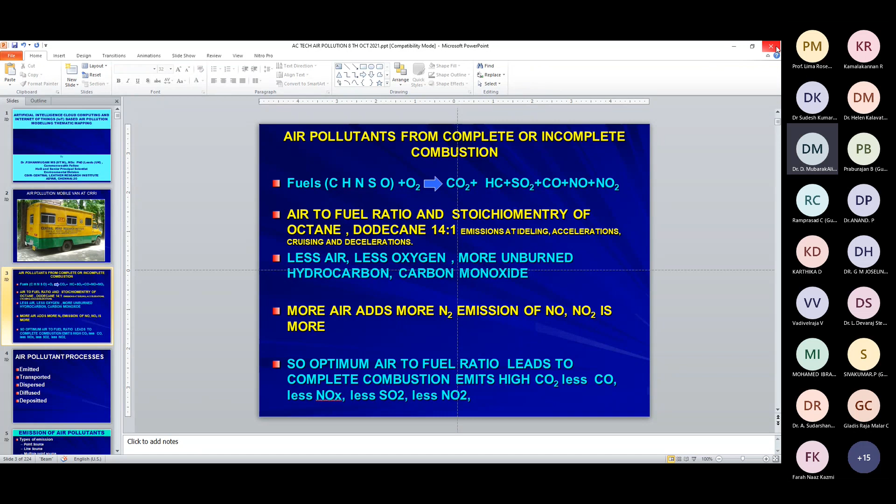Excuse me sir, your slides are not moving and you are in the first slide itself. You can make it full screen if you can. Now it's in the second slide. Is it moving? Third one slide now. Yeah, fine, that's how it is, it's moving sir, but it will not come to full screen or slideshow mode. I'm sorry, it's not in slideshow, oh I'm in the slideshow but it's only showing here. Okay, we'll adjust with this, though the presentation will be odd if it is so. How about now, it's a little bigger. Is it in slideshow now? No sir, it's not in slideshow. It's just a little bigger but still in that format normally used for presentation - yeah okay but it should be in slideshow mode. It's still in Microsoft PowerPoint format, it has not shifted to slideshow. Sir please click on the right side lower corner - yeah that one, lower corner, the first one, after 100% it shows, afterwards the first one, 100% and first one - I click the same, oh achha, okay now I click the same, yes there is a problem. Where is the problem, with me or elsewhere? No, because on my screen it is slideshow, on my screen it is slideshow. Oh achha, maybe there is some problem - theek hai, nahi maine mere screen pe abhi slideshow dikhta hai. Sir why don't you remove and join again, sir? Okay I'll join again, yes sir. Yesterday ma'am also had this kind of issue and they got it done. Okay I'll just leave, come out and join - just a minute.

Hello sir. The only meeting organizers and presenters can share like that. You have not given me the permission to share. You're there as the presenter. But the share button is not open, it says only meeting organizers and presenters can share. Only two of us are there, you and me. You're there as presenter only. If I do anything, you'll become an attendee, maybe I'll do that and then put you back as presenter. We'll see whether it works.

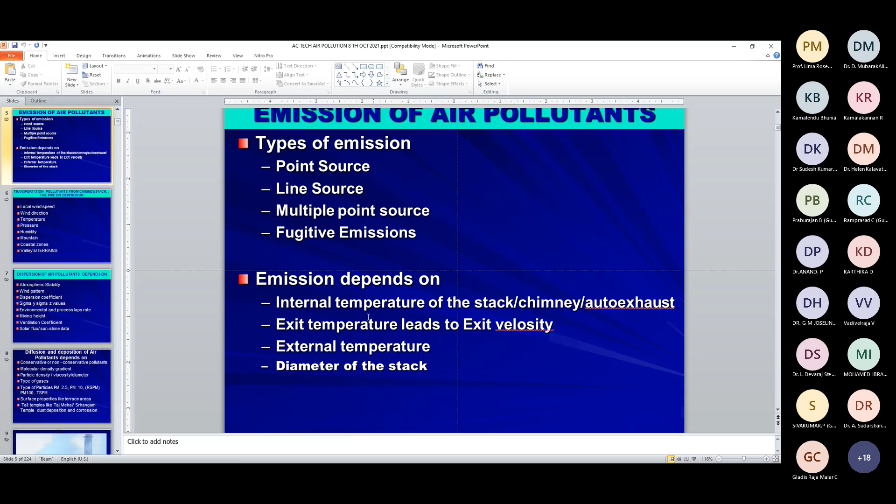This is what we normally call source emission inventory. Whenever pollutants come out from any source, what is the strength of the source - the strength of pollutants arising from a point source, line source, multiple point source, or fugitive emission - is a very important parameter to model and predict. These emissions depend on internal temperature of the stack, chimney, and auto exhaust. Exit temperature leads to exit velocity, and exit external temperature and diameter of the stack are the major factors that the emission velocity and further processes depend on.

The transportation, or the transport of pollutant - the third important process - is called the transport of pollutant from the chimney or stack.

When a chimney emits a pollutant, the next process is called transportation of the pollutant, where it travels. That's called upwind, and the distance it travels, finally ending in deposition, is called downwind. So from the upwind direction, according to how the wind is flowing, the pollutants and the plume will flow.

So the local wind speed is an important parameter - what wind speed it is, in miles per hour or not - and what is the wind direction. There are 16 directions of the wind: southeast, south-southeast, northeast, north-northeast, east-southeast, and so on. The 360-degree angle of the globe is divided into these 16 directions.

The temperature is one of the important phenomena when the pollutant travels, along with pressure and humidity. If it is in the mountains, it straight away comes down or goes up. In a coastal zone, particularly a city like Chennai located on the coast, there's a tendency to receive all the pollutants because of the breeze when it goes inside. When the breeze comes out it takes little, but more often when the breeze goes inside, it carries the pollutant into the sea, the valleys, and the terrains.

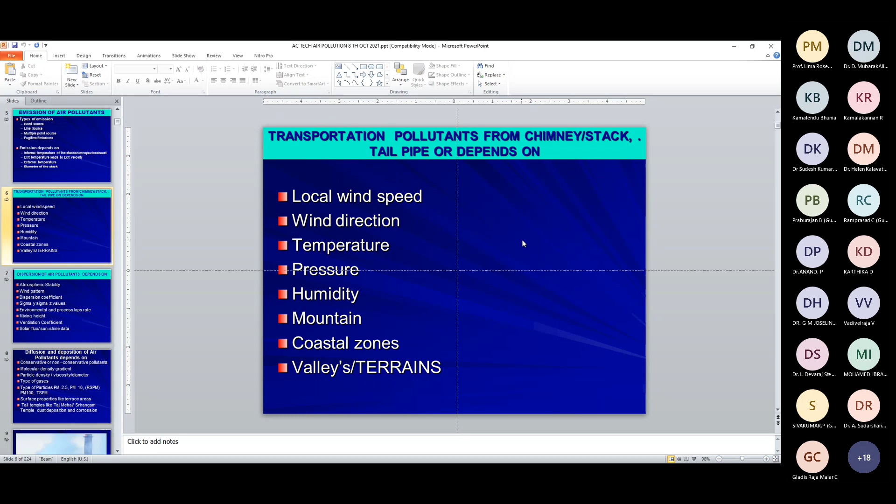So this is the transportation of the pollutant - the distance it can travel. Particularly if the wind speed is very high, it can travel a long distance. If there is no wind speed, it cannot travel far. So the next one is dispersion. First I said emission, second transport, and the third one is dispersion of the air pollutant.

These depend on atmospheric stability. What is called stability of the atmosphere? It is the tendency to resist the dispersion of the pollutant or enhance the dispersion of the pollutant. Scientifically, when the earth is heated up, a buoyancy force comes out from the earth. That buoyancy force, called temperature lifting, will take the pollutant to a higher altitude. If the earth is not heating up, there is no buoyancy force, and whatever pollutants are emitted from the chimney or automobile industry exist as they are in the lower atmosphere.

The atmospheric stability is the important parameter to decide the dispersion of the pollutant and to decide the maximum ground level concentration of the pollutant near the chimney or near the road, or far from the road. Stability is one of the important parameters.

Again, the wind pattern has got wind speed and wind direction put together. We prepare a wind rose. What is a wind rose? It shows, according to a particular location, which direction the pollutant travels and at what speed - that we call the wind pattern or wind rose.

And the dispersion coefficient - sigma y and sigma z values - are very important parameters to predict the dispersion of the pollutant.

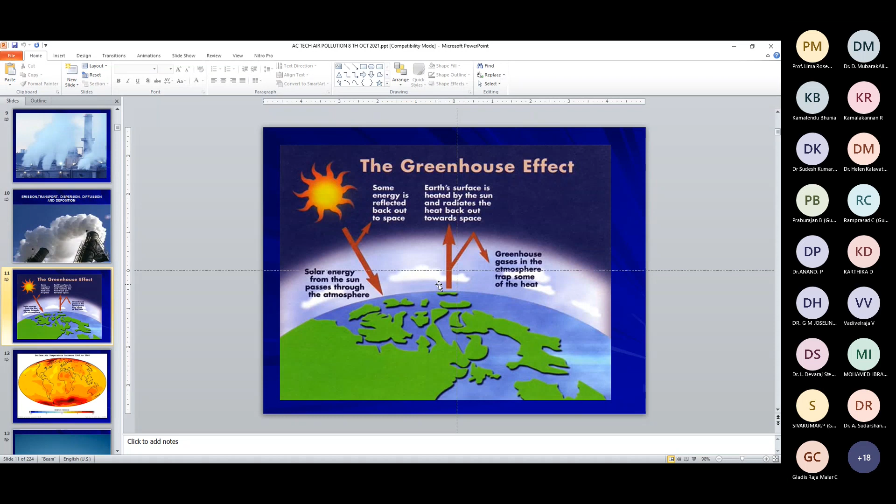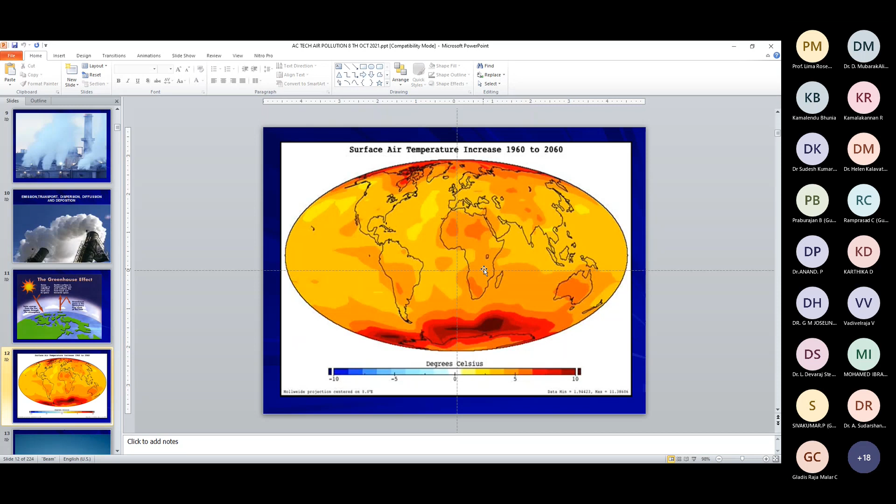This is why we give so much importance to air pollution instead of solid waste management or water pollution. Whenever water pollution is in a pipe, it can be controlled and made into a detoxified substance. But with air pollution, once it is emitted to the atmosphere, it is not in our control.

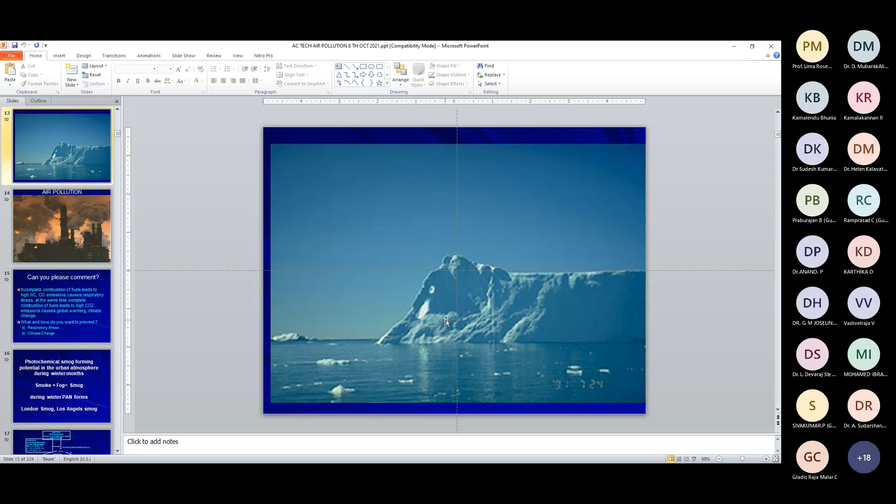It is in the atmosphere's control, the phenomena or process of atmospheric stability that is going to play. So we need a better understanding, although we cannot have exactly accurate understanding of how it is going to predict or map it. But almost 90% to 95% accuracy we can certainly predict. So these are some of the scenarios.

Incomplete combustion of fuels leads to a lot of carbon monoxide and hydrocarbon emissions, and that's what I wanted to mention here. Photochemical smog forming potential in the urban atmosphere of any urban center during winter months.

This is one of the important processes and concepts we must all be aware of - whether the smog episode is likely to happen or not in most urban centers.

Particularly in Chennai, if you take January 12th or January 10th, January 15th, in the morning it's very intense cold because you'll feel a lot of foggy conditions. That is when vehicular pollution emits a lot of smoke, and that combines with the fog, and that becomes the smog.

When the smog exists in the atmosphere at more than 10 or 11 o'clock, when the UV rays and sunshine rays are appropriate, the photochemical reaction triggers, and the ultimate end product of the photochemical reaction is peroxyacetyl nitrate.

That is why peroxyacetyl nitrate was one of the major culprits that took a lot of lives in the Los Angeles smog and London smog.

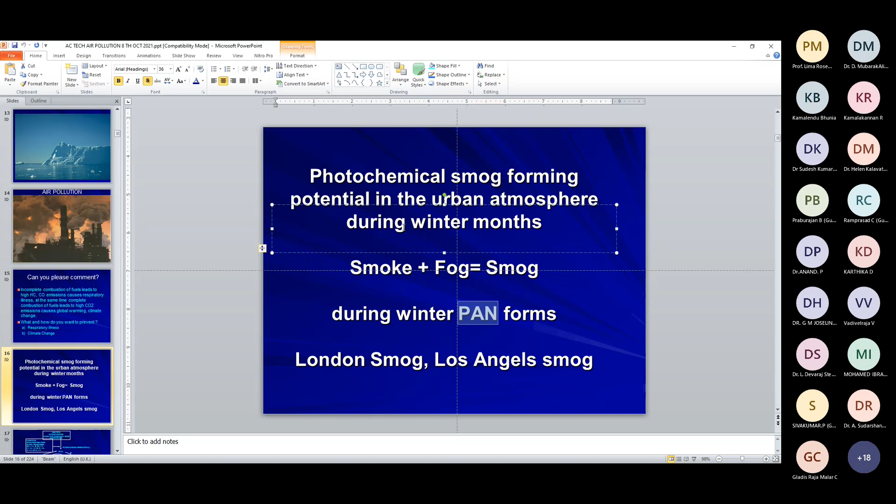So therefore, if the Los Angeles smog and London smog are not to occur in our own country, we must be alert about how to predict the photochemical smog forming potential based on the different precursor pollutants being emitted from vehicles or industries.

So how this photochemical smog forms - I just wanted to mention this to you. Reactive hydrocarbons are emitted from automobiles, and these undergo principal oxidation reactions in the atmosphere.

It happens when nitrogen oxide or oxides of nitrogen or nitrogen dioxide is emitted to the atmosphere. The photon energy oxidizes it and converts it into NO plus O, and the atomic oxygen combines with molecular oxygen, forming surface ozone.

So when the surface ozone is high enough, particularly between 10 and 11 o'clock in the morning at moderate sunlight, again with the photon energy, this forms further reactions.

But this ozone, O3, in the surface ozone actually oxidizes the hydrocarbon free radical. For oxidizing the hydrocarbon, the surface ozone is the biggest culprit - it oxidizes the hydrocarbon and forms a free radical.

This forms peroxyacetyl nitrate at the end, which becomes a carcinogenic substance, causing a lot of suffocation and many other natural diseases.

So therefore, photochemical smog is one of the important concepts we must all address. This is one study I worked on when I was in Delhi.

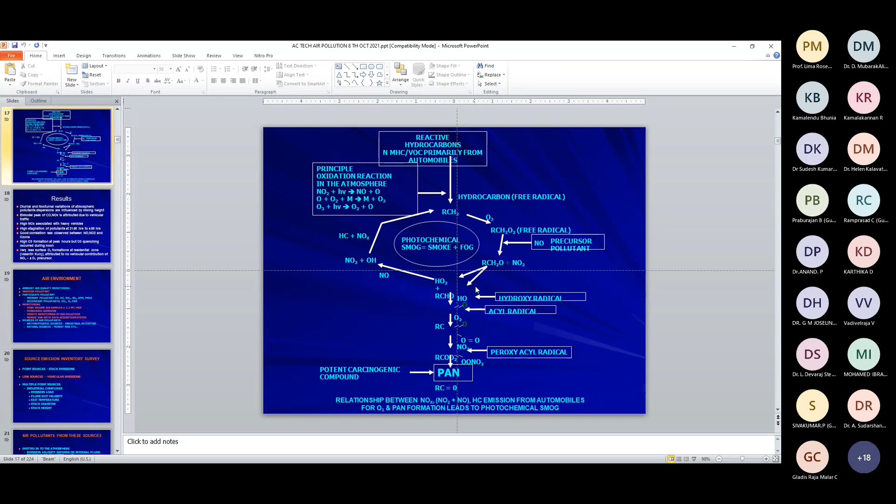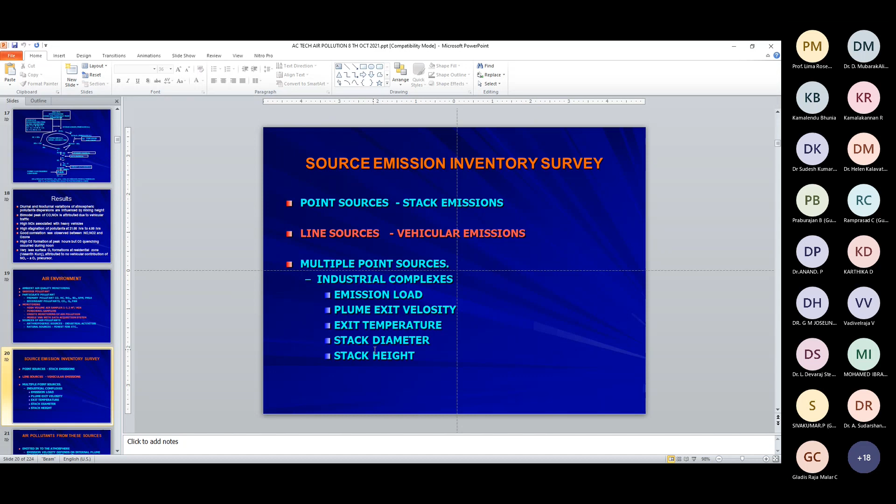So these are the sources - anthropogenic and natural sources. I've already mentioned point source, line source, and multiple point source. For industrial complexes, we need the emission load, or source emission inventory, and the plume exit velocity, exit temperature, stack diameter, and stack height. Air pollution from these sources is emitted, transported, dispersed, diffused, and deposited.

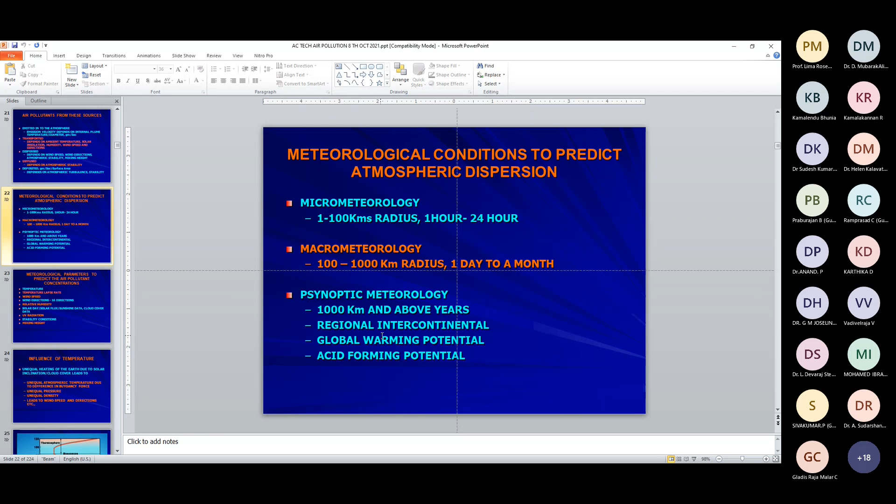Very importantly, micrometeorology and macrometeorology parameters matter. Micrometeorology covers a distance of 1 kilometer, 1 to 100 kilometer radius, and hourly pollutants up to 24 hours; we can use this to predict micrometeorological models. Macrometeorology covers 100 to 1000 kilometer radius, and synoptic meteorology is 1000 kilometers and above. This is the regional intercontinental model, particularly for climate change models. So we call these micro scale, meso scale, and macro scale models, and the synoptic model is used for global warming potential prediction and other things.

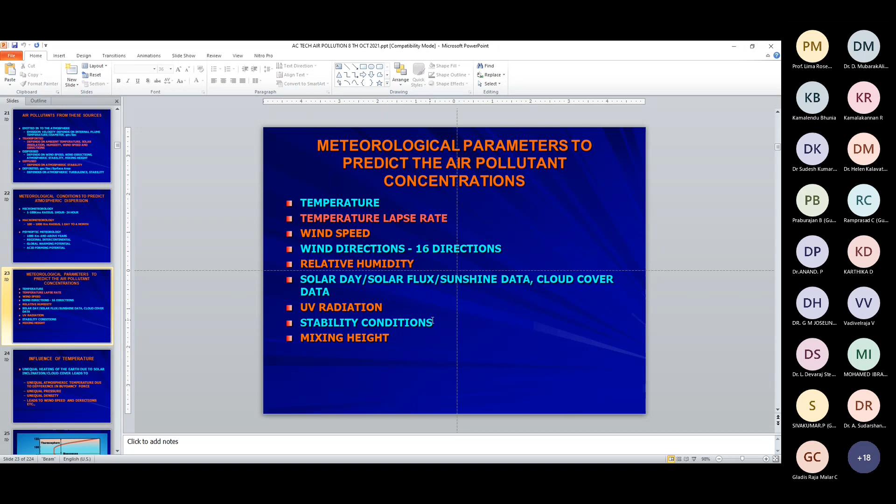So what are the meteorological parameters that can predict air pollutant concentration? These include temperature, temperature lapse rate as I mentioned, wind speed, wind direction, relative humidity, solar day data, UV radiation data, stability data, and mixing height data.

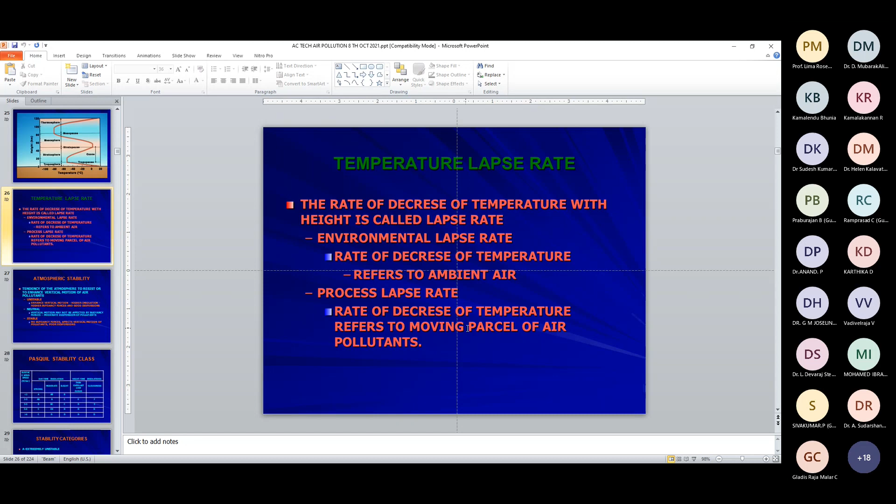And this is the temperature lapse rate I mentioned. The rate of decrease of temperature with increase in height is called lapse rate. And I told you the lapse rate is environmental and process lapse rate. Thus, atmospheric stability is one of the important parameters, a tendency of the atmosphere to resist or enhance the vertical motion of air pollutant, or vertical dispersion of air pollutant. There are mainly 3 types of stability: unstable, neutral, and stable.

And this is some of the stability conditions we plot: strong and moderate wind speed, daytime solar insolation and nighttime insolation, and we take the cloud cover data, cloudiness data, and thin overcast low cloud data. So if the wind speed is less than 2, 2 to 3, 3 to 5, 5 to 6, and above 6, what will be the stability if the daytime has high insolation? A, B, C, D, E, like that.

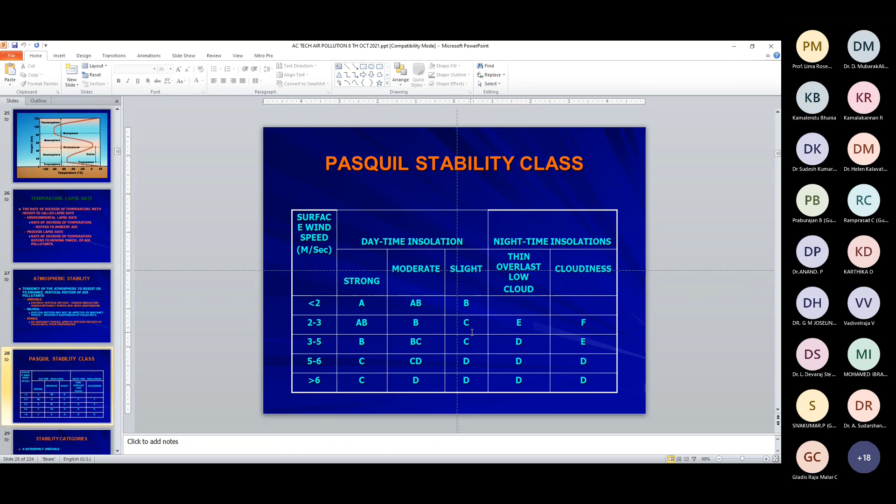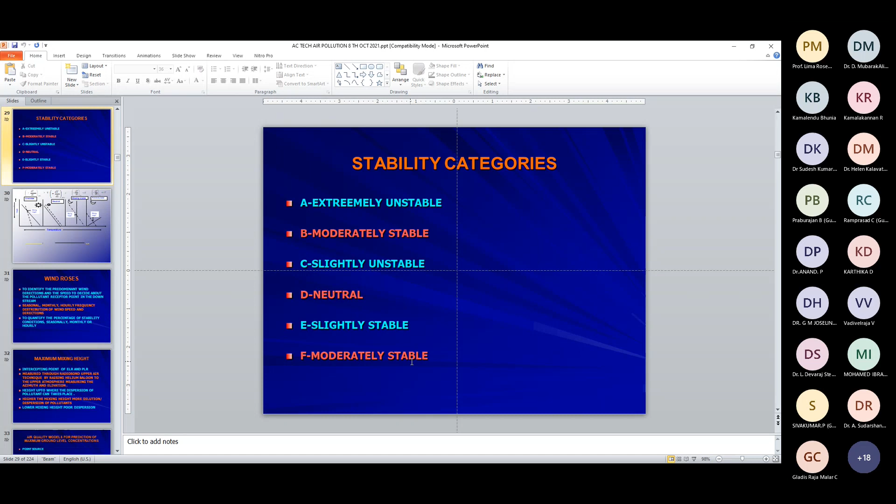So E and F are stable, extremely stable. A, B, and C are moderately unstable, extremely unstable, and stable, and D is normally neutral. So this is what it is: A is extremely unstable, B is moderately unstable, C is slightly unstable, D is neutral, and then slightly stable, moderately stable, and extremely stable. This is how we classify the stability conditions in the atmosphere.

So as I said, stability is one of the very important parameters to decide the dispersion of the pollutant. I already told you about environmental lapse rate and process lapse rate. The environmental lapse rate is naturally the environmental rate of decrease of temperature, particularly if it is Chennai, or Trichy, or Viluppuram—there is a standard lapse rate with reference to months, seasons, and year of year.

So if it is winter months, the lapse rate will be quicker. The rate of decrease in temperature will be very high, maybe 0.9 degree or 1 degree centigrade per every 100 meters. If it is highly summer, because heating takes place, it will be 0.6 or 0.5. So the rate of decrease with reference to the actual environment is called environmental lapse rate.

And if it refers to the process parcel, or instantaneously, any day that we are going to do monitoring of air pollution or modeling of air pollution, that day we raise a helium balloon. Normally the helium balloon has got a thermistor on the bottom. When the balloon is raised, it sends a signal to the computer by azimuth and elevation point, and then the computer predicts the rate of decrease of temperature instantaneously. That is taken as the process lapse rate.

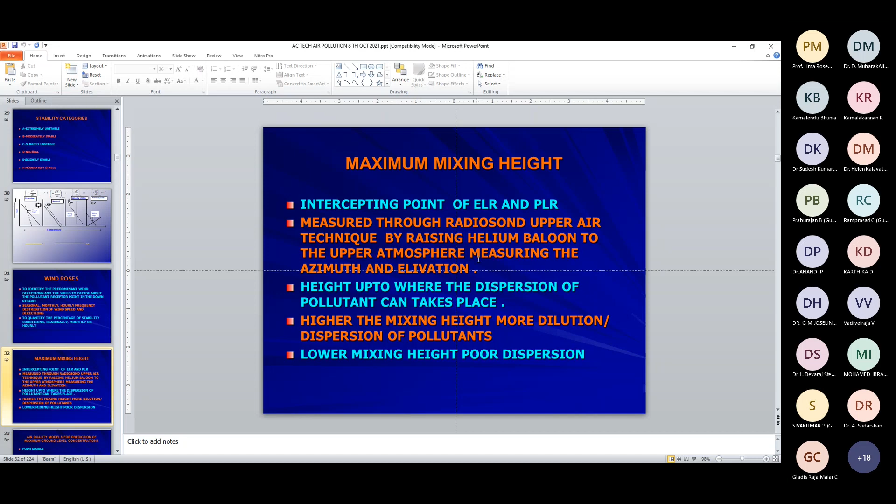And now when we look at it with the advancement of air pollution thematic mapping, advanced real-time monitoring and mapping, we might have to give it to the NRSA, National Remote Sensing Agency, or the Regional Remote Sensing Agency, and then they should integrate software with cloud computing, IoT, and this system, along with online air pollution monitoring sensors. Both should be integrated into the software, which should then predict using online NRSA data as well as online monitoring data synchronized together. We have to give a common concept of the equations and models there, and that model has to be an online, pre-diagnosed or pre-detected mapping system. That is the focus of today's topic.

So I mentioned point source, multiple source, and other things already. This is some of the control measures like centrifugal filters, particularly for industries. They have control measures like electrostatic precipitators, baghouse filters, and cyclonic filters. All those control techniques are available for particulate and gaseous pollutants. There are some pollutants that exist as point source, line source, or multiple point source, and the modeling concept is different for different approaches.

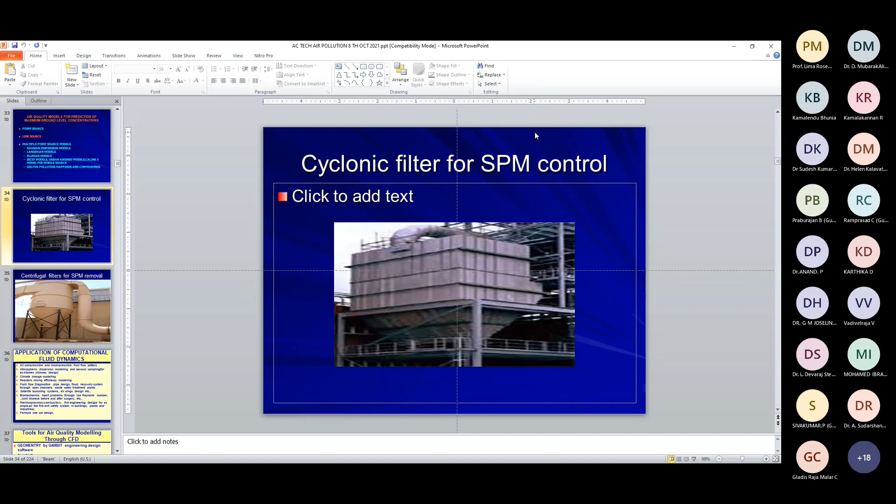Whether it is multiple point source or line source, we use a Caline 3 model. If it is a multiple point source, we use a terrain model. If it is a single point source, we use an ISCST model, a Gaussian distribution model. All these models, whether it's plume dispersion referring to air dispersion, or flume dispersion referring to water or effluent dispersion in a river, are based on the Fickian diffusion equation, or Fick's law of diffusion. Most chemical engineers would have studied Fick's law of diffusion, and that law is actually used for the prediction of this model, particularly through a Gaussian dispersion model.

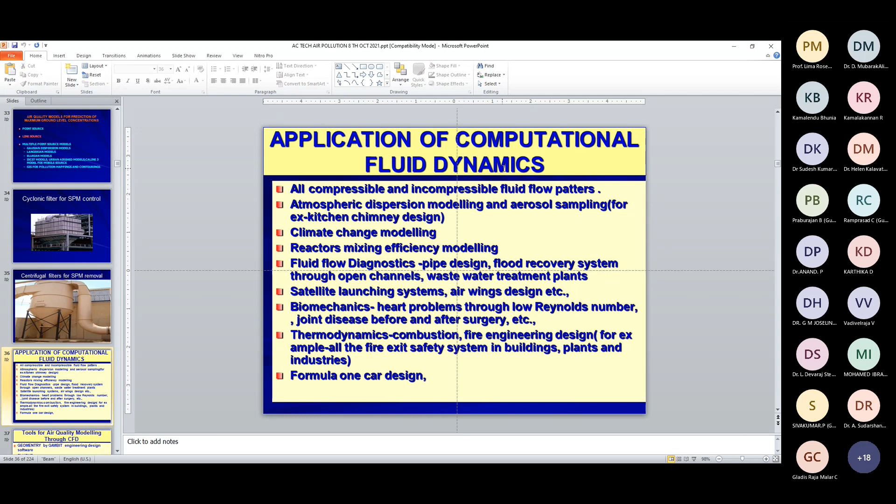In fact, my wife, Dr. Lata, has used CFD modeling for the prediction of air pollutants. This is one of the works that she did, and we jointly made air pollution dispersion models using computational fluid dynamics techniques. You can see how these pollutants were modeled using Fluent, CFX, Gambit, or G-Sharp to predict air pollution dispersion.

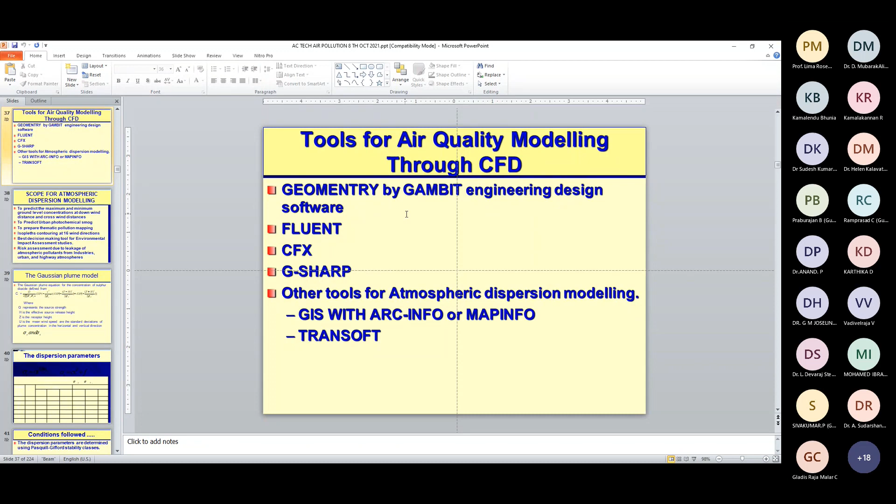And this can predict urban photochemical smog as well, and it can prepare a thematic air pollution mapping, because CFD is also good software that can be integrated into ArcInfo or MapInfo.

Once we digitize an industrial site location or an urban site location, then we pinpoint whatever the monitoring station locations are. Then we can integrate the data into that, integrate the meteorological data onto it, and then it can give a dispersion modeling and mapping process that I'm going to show you.

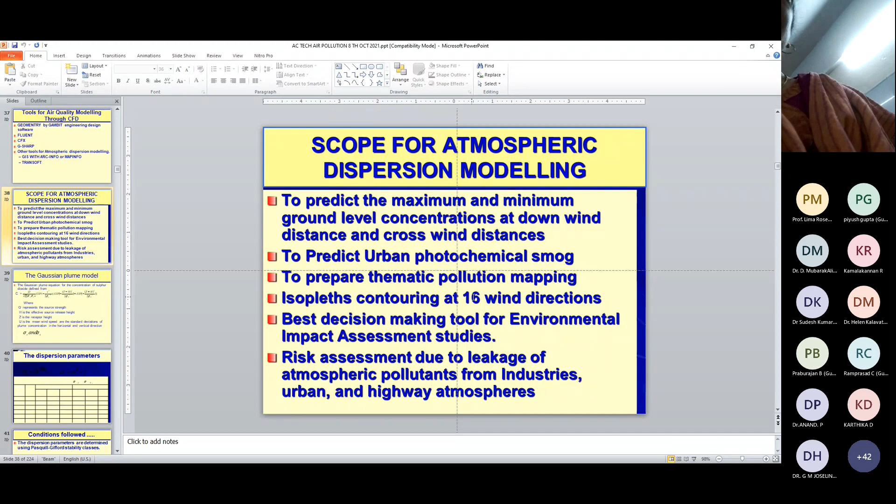So this is how they use the air pollution prediction model using the Pasquill-Gifford stability conditions and the Gaussian dispersion equations. The parameters used in air quality modeling include winter, summer, and slightly moderate summer conditions.

Wind speed and stability - stability in the night normally used to be class F, or if it is in summer, it used to be class E. If it is slightly rainy, it used to be class E, but F is extremely stable, particularly in February or the winter month.

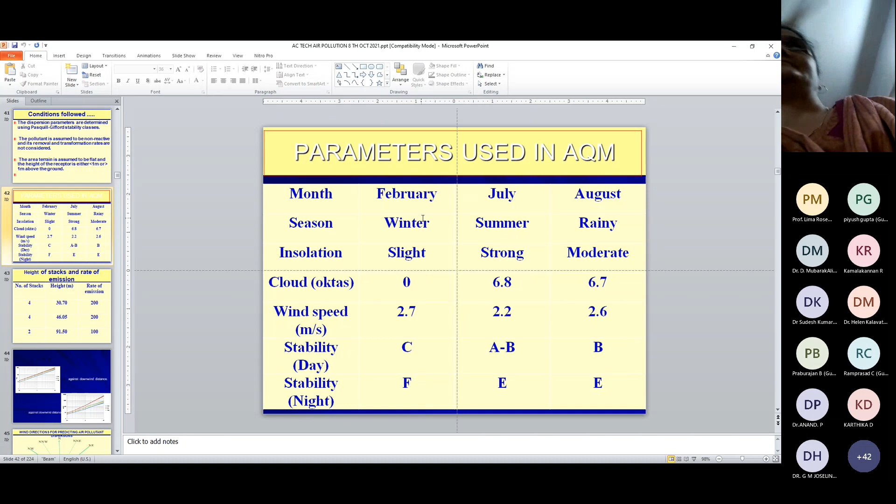The height of the stack is very important, and the taller the height, because the design of the stack itself is a very important concept before they do a comprehensive EIA or a rapid EIA work.

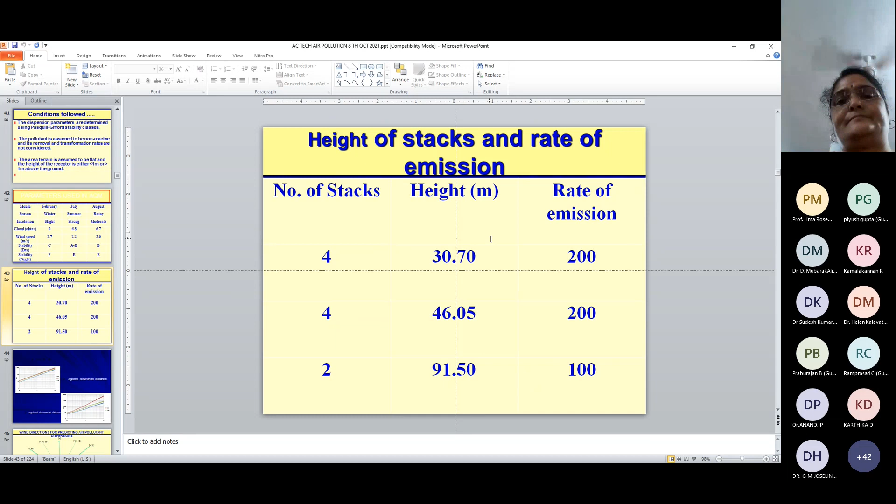But the real-time modeling has got a different process, different parameters that we take into account for prediction of sigma y and sigma z.

And of course, I mentioned the mixing height for dispersion modeling - the buoyant energy available from below the mixing height actually helps the dispersion of the pollutant.

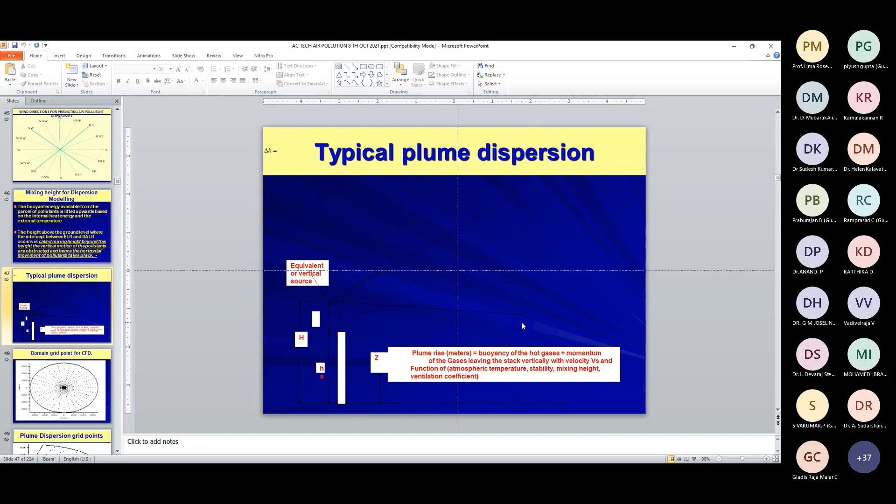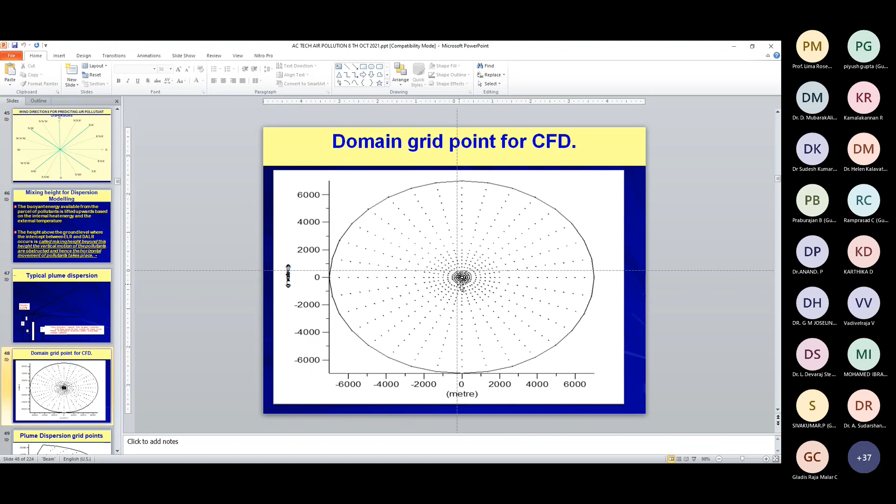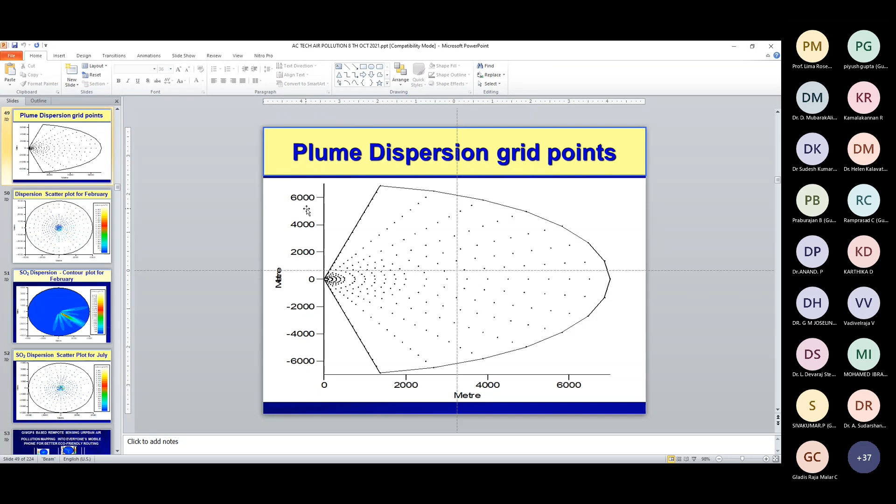So this is the different grid. We can say downwind distance x, y, z coordinate - this is the x coordinate, and this is the downwind distance in meters. Here you can see the point source pollutants are emitted based on the wind speed and wind direction, which direction it travels. This becomes a point source, and this becomes the left and right, x and y directions, showing how the pollutants can travel based on wind speed and direction.

So the dispersion of the pollutant based on wind direction and wind speed - this is the simple model for a particular intersection or near hospitals or other places, but it is only a one-time live modeling, which is not connected to the advancement of cloud computing, IoT, or artificial intelligence.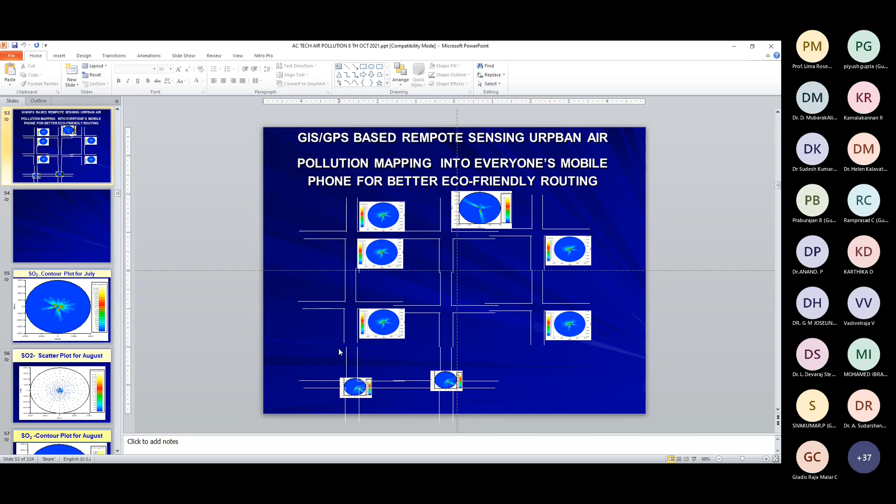That's what you are going to see now. You can see SO2 contours. You can see SO2 contour in the month of August. So this is some of the CFD modeling based conclusions.

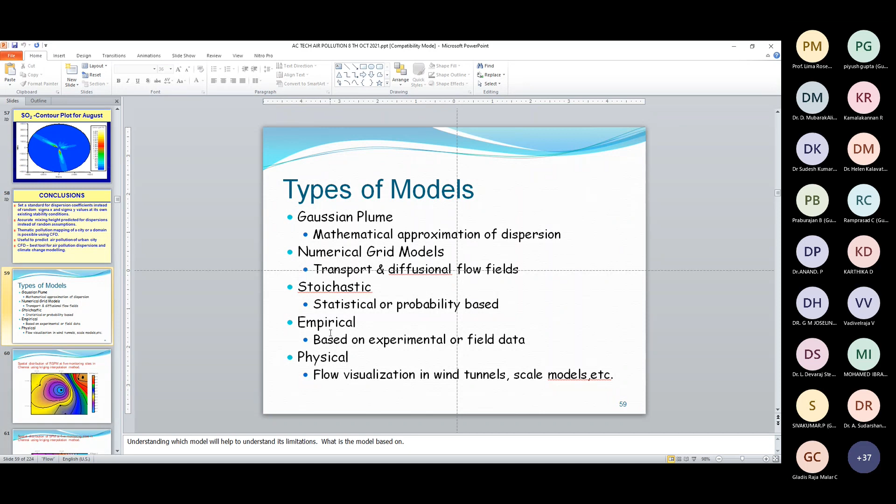Of course, CFD is a very versatile tool that can predict air pollution dispersion very nicely. And there are other types of models also, like numerical grid model, stochastic model, empirical model, physical model, and apart from the Gaussian plume dispersion model.

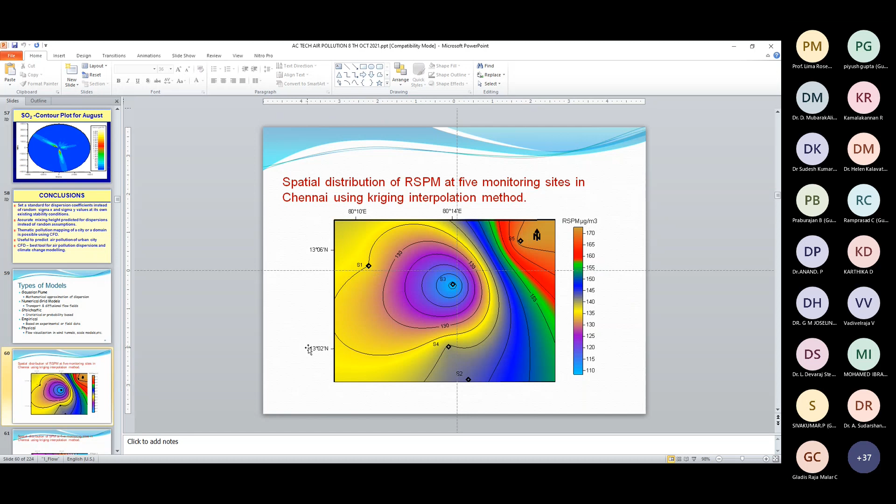And this is the spatial distribution of respirable suspended particulate matter. So the second type of model using numerical methods or finite element analysis, we can use this model and make predictions on a particular wind direction. And this is the spatial distribution of suspended particulate matter.

That's what now we are actually coming into the advancement in artificial intelligence, cloud computing, and IoT synchronized air pollution thematic mapping in real-time mapping.

So the Bihar State Pollution Control Board is all set to use artificial intelligence and remote sensing technology to detect key sources of air pollution in the state through satellite imaging and real-time monitoring. This is more important, the satellite imaging and real-time monitoring using artificial intelligence that the Bihar State Pollution Control Board is going to follow.

For this, the Bihar State Pollution Control Board chairman, along with UNDP and the University of Birmingham, joined together and made an advanced real-time air pollution monitoring, mapping, and modeling system.

So we know Google mapping to go from one place to another. Can we have Google air pollution mapping similar to this? That's the intention of it now.

This artificial intelligence work is much well appreciated and was done for the Bihar State by the Bihar State Pollution Control Board. The researchers also used cloud computing and IoT. And Loughborough University in UK also used the Newton Fund; they used advanced artificial intelligence and cloud computing based air pollution prediction systems.

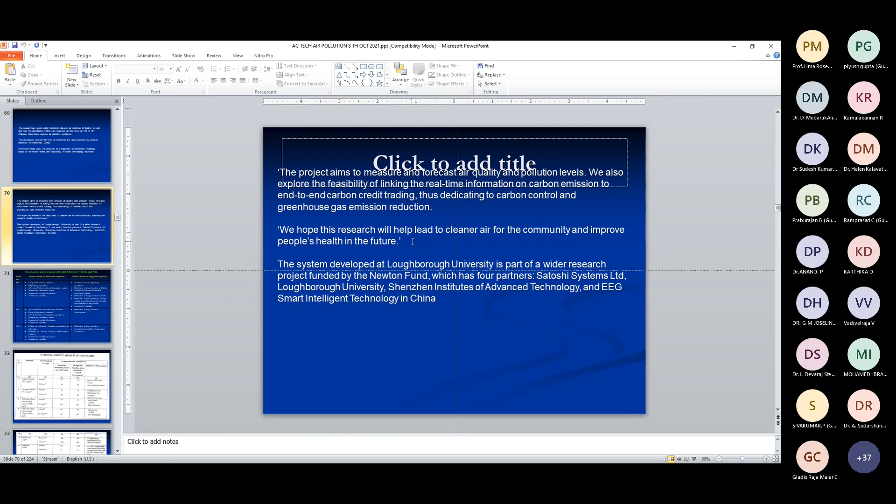This is the standard Central Pollution Control Board standard for every pollutant, sulfur dioxide, oxides of nitrogen. We all must have it as a reference standard. Most Indian citizens must know the concentration standards of sulfur dioxide and oxides of nitrogen, and PM10 and PM2.5 minimum threshold values that should not be exceeded.

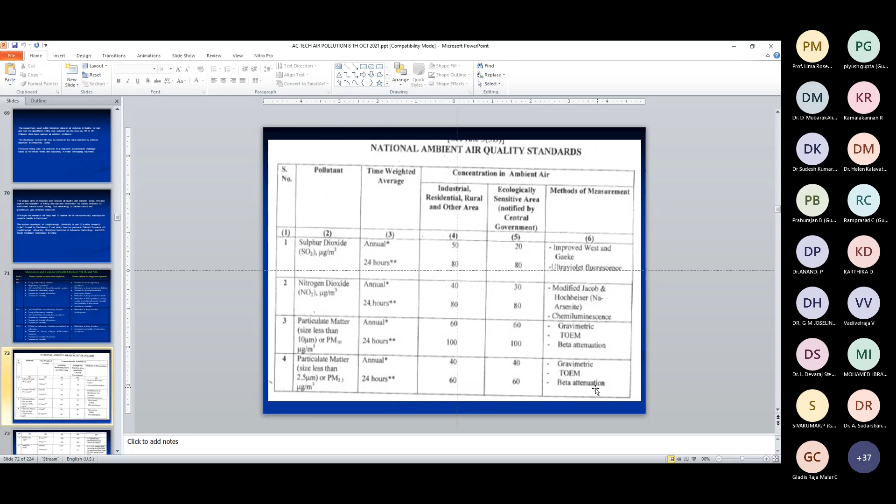You can see here, PM 2.5 for 24 hours is only 60 microgram per cubic meter, and if it goes beyond that, it becomes dangerous. So what is the standard for ozone? Lead, carbon monoxide, and carbon dioxide is 0.02%. That is the standard. This is the ready reckoner standard that we must all use for reference.

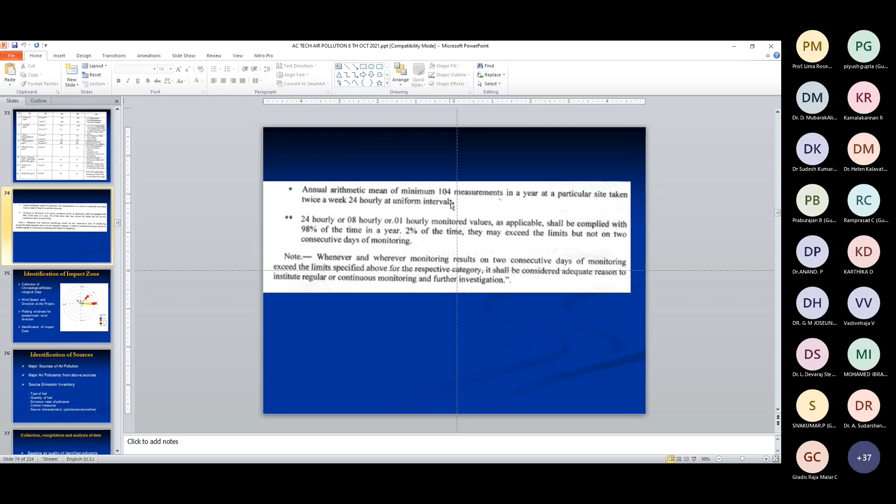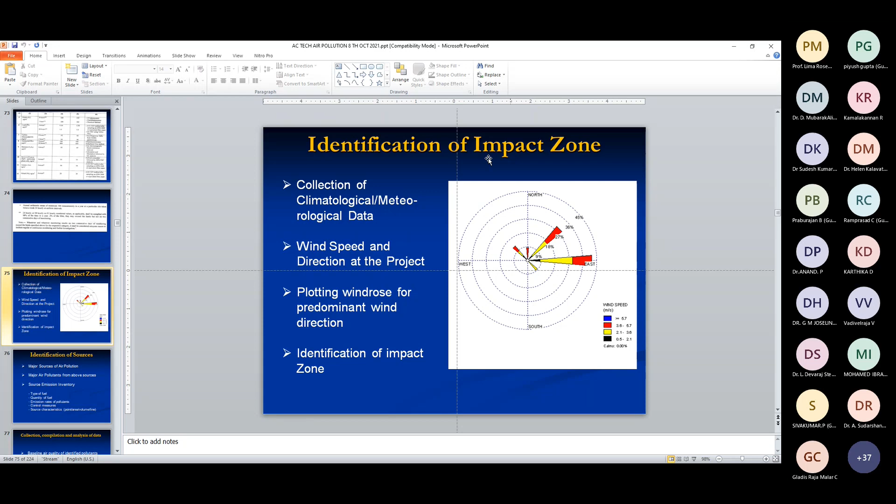And this meter per second shows the distribution at every distance. So the red one is actually the maximum, and the blue one—there is no blue one here—it would be above 5.7 meters per second, but it's not there at all. So this is some of the sources.

These are the different models being attempted: ISCST3, PAL model, FDM model, CDM model, ADM model. There are also CALINE3, CALINE4 models. So many models are being used and practiced nowadays. These are mathematical models, and the industrial source complex models were developed by the US Environmental Protection Agency.

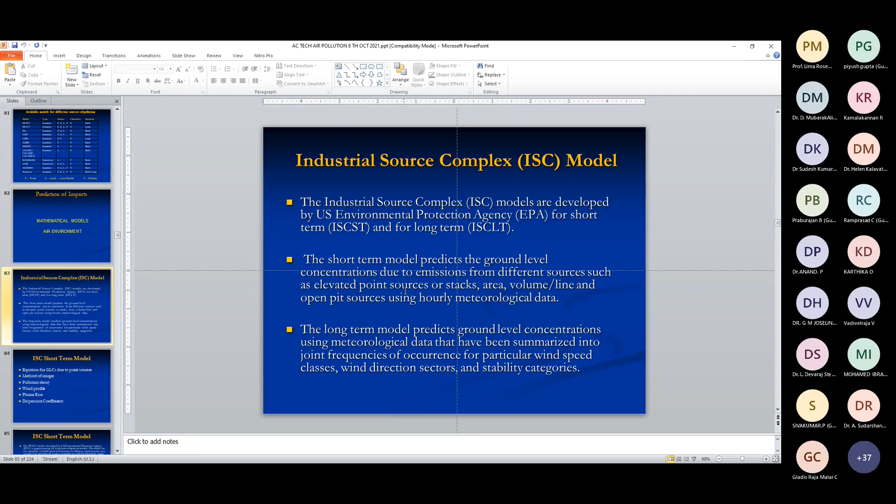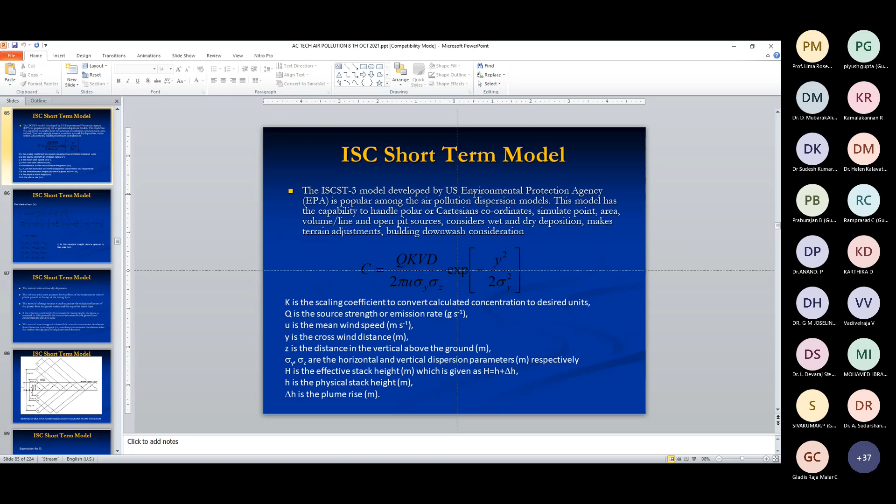The ISCST short-term model is based on the wind profile. Based on the wind profile, we can calculate the stability category. This is the kind of calculation based on the rural exponent and urban exponent. These are standard values we keep for the Indian context, and then we calculate the stability category, whether it is A, B, C, D, or E.

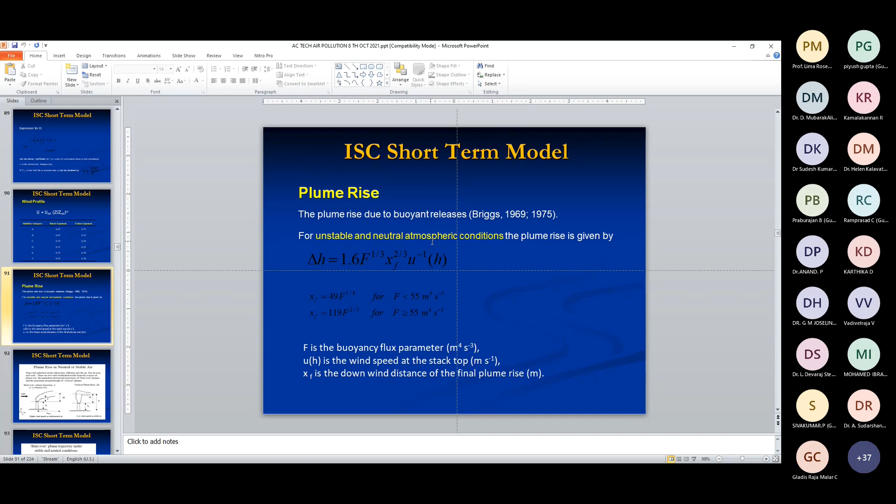So these are the plume rise equations, beyond the height of the plume, how much distance it can go up. The plume rise in neutral and stable air, how it can disperse. This shows the pattern of the plume, and the height between the exit stack and up to here is called plume rise. The plume rise happens based on the internal temperature. If the temperature is very high, the plume rise height will be very high. If the internal temperature is very low, it gets neutralized with atmospheric temperature, and the bend will take place immediately. So this is the plume dispersion pattern.

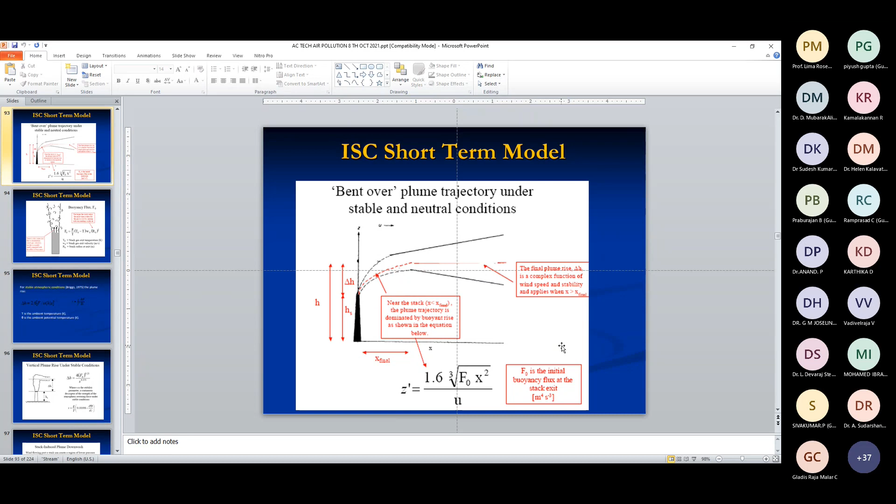So then it can go, but when resistance in the upper atmosphere happens, it can come down, and partly it can settle down somewhere here. So this is the ISCST model, again the ISCST model.

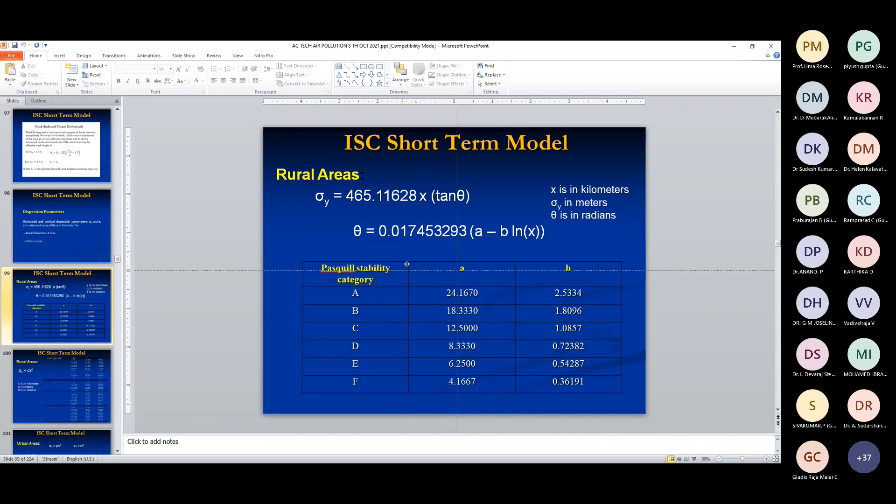So dispersion parameters, what are the parameters that we use? Sigma z values are a very important thing that we normally calculate, the dispersion coefficient in X and Y directions, in rural areas and urban areas. How sigma y and sigma z is calculated based on the theta value. You can see how these theta values are used in different locations.

So hourly data comprising these we normally need. Precipitation index is also needed as some modeling input. For the point source: location of the stack, stack height, stack temperature, stack gas exit velocity, and stack gas exit temperature, emission rate of pollutant in gram per second, are input parameters that we need. And for the area source: location of the area, emission rate, and release height above the ground, length in the x direction and y direction, that's the downward distance, and the initial vertical dimension of the plume source.

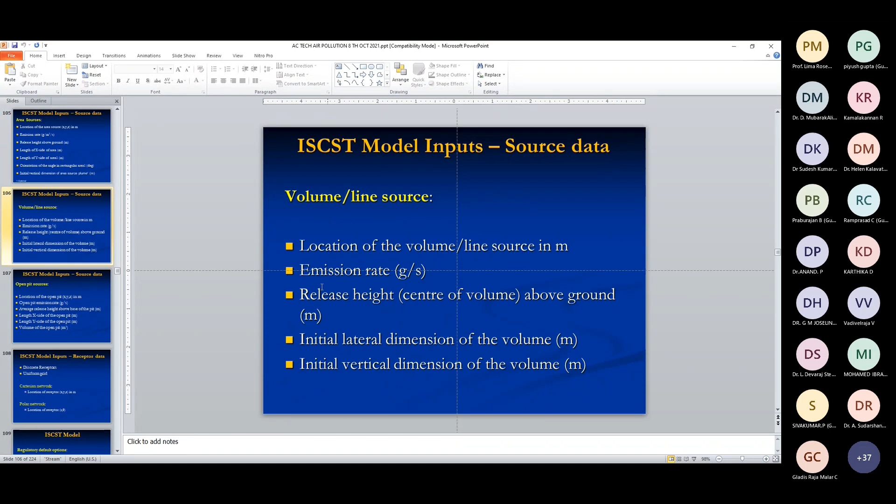This is the ISCST model input, what are the input data we require? And for open pit sources, location of the open pit, and ISCST model inputs again for different conditions.

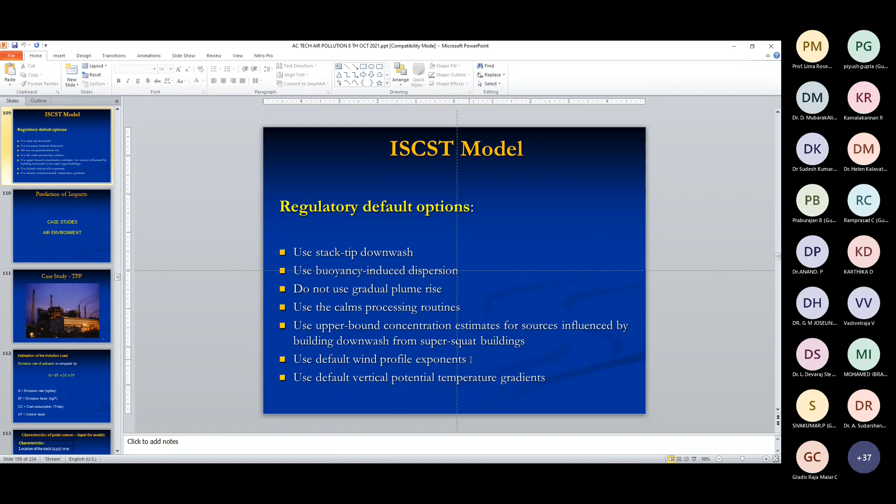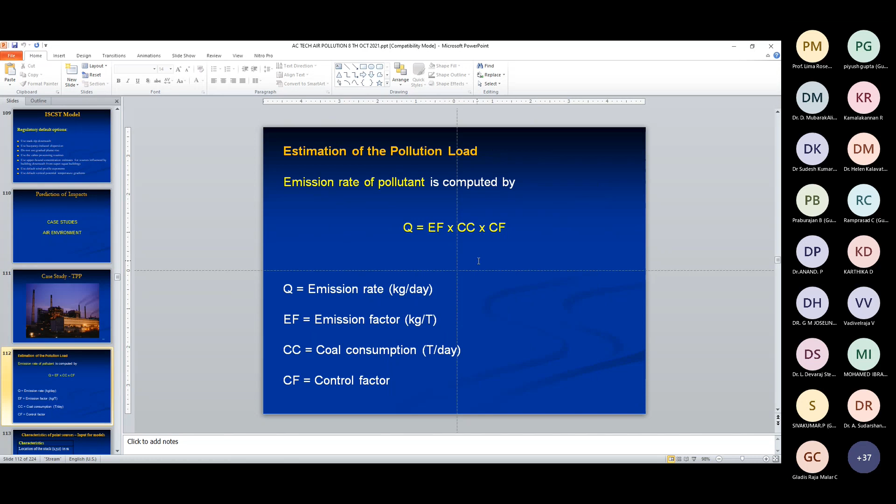We call it the anemometer, cup anemometer, and this is a wind vane. The anemometer measures the velocity of the wind, and the wind vane measures the direction of the wind. It gives automatic data collection like east, south-east, at 5 meters per second or kilometers per hour, or by knot value. It gives continuously and gets printed and recorded.

And then in the adjoining area, we can also measure the pollutants. It's done already, and the pollutant measurement and the micrometeorological data are synchronized together and used in the model. And of course, we need helium balloon raising data and the azimuth elevation, with the environmental and process lapse rate.

Also, we need to understand the stability conditions. This is emissions used for different predictions. We can change permutation combinations with the emission factors, with the emission load, and even sometimes what I interestingly do is using an Excel sheet.

I create an equation editor and create a lot of equations in there, and I get different downwind distances and different upwind distances which I feed in from the point source, and we get a maximum ground level concentration based on the sigma y, sigma z, and the stability parameters that we are going to feed in.

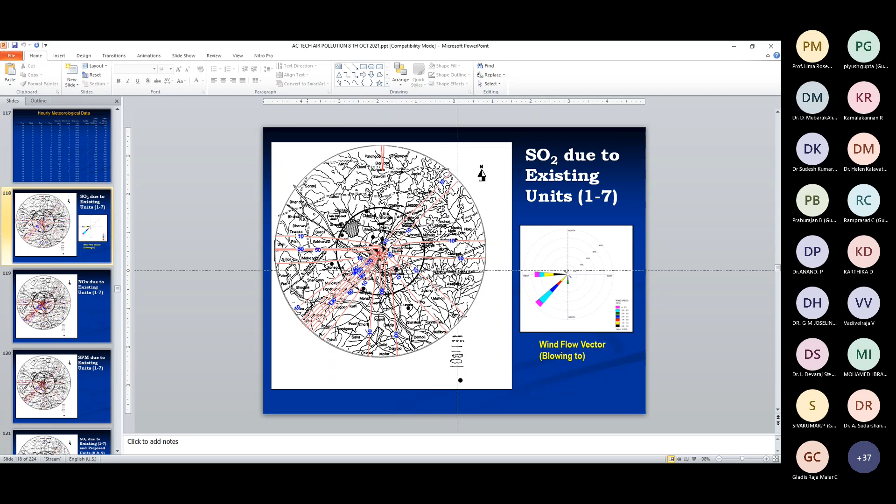There's not much here, and similarly the pollutant accumulation happens in this location. It has happened here, it has happened here in the blue color, it has happened here. Nothing happens in this region, opposite.

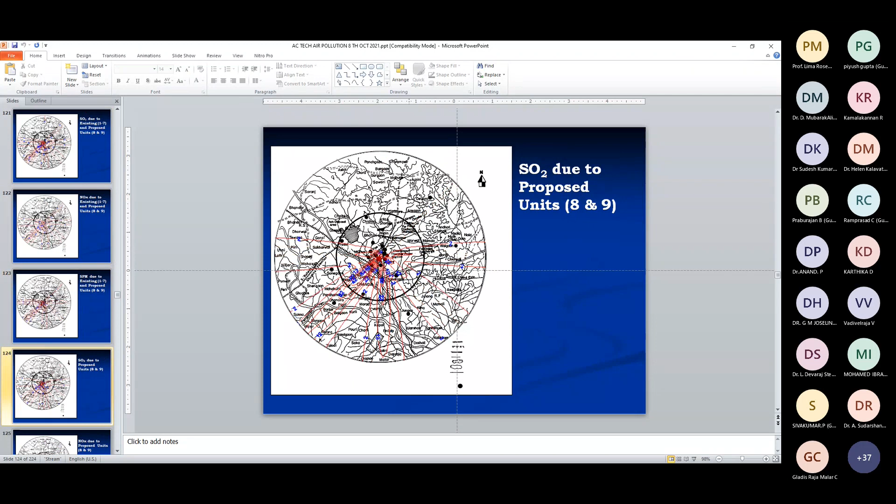So you can also look at the windrose that we have made. You can also look at the output of the ISCST model prediction, the mapping that we have made.

So both should exactly coincide and show exactly the same direction as the windrose, and the dispersion pattern should show the same direction too.

So normally we need height of the stack, we need internal diameter, we need exit velocity, we need exit temperature, we need SO2 concentration, NOx, SPM, SO2, and NOx and SPM concentration.

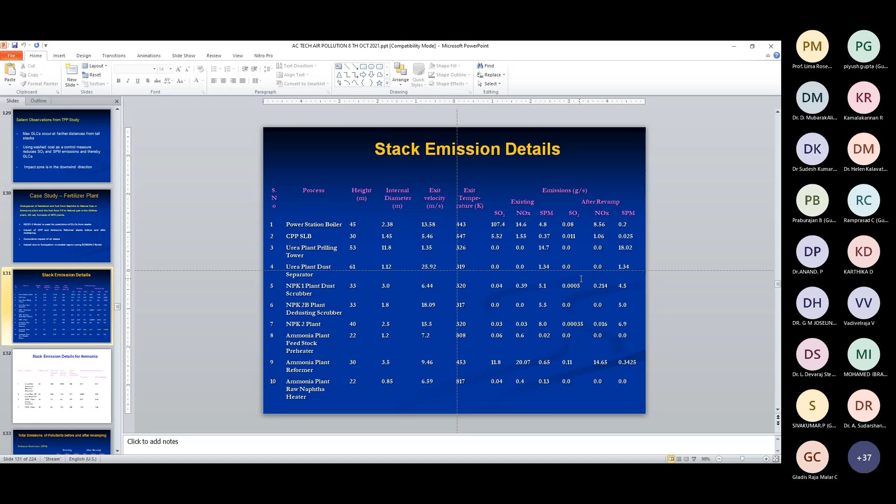All these concentrations in terms of gram per second from the chimney, from the chimney, not in the atmosphere. From the chimney it is needed, and then this data can be used as an input for modeling.

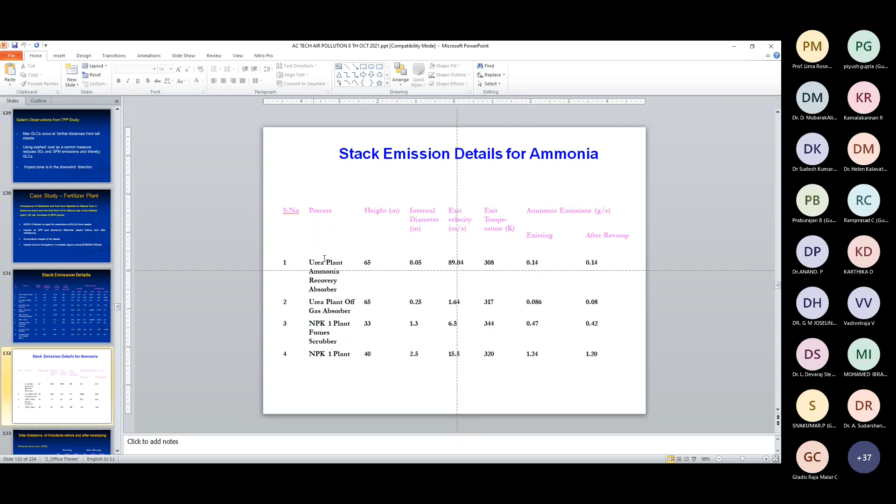So stack emission details of ammonia, wherever there is much ammonia content, it can predict and give you the total emission of pollutants before and after revamping.

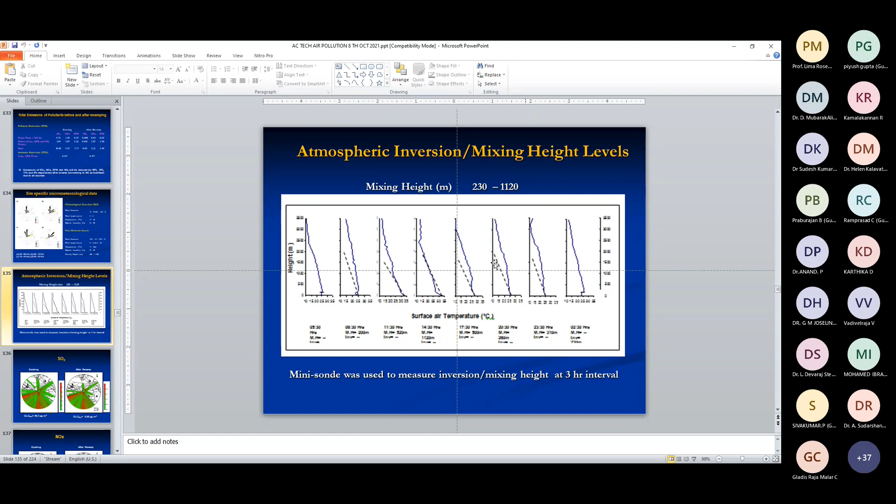This is the atmospheric inversions, what happens in different time intervals with different solar insolation data. This is now before and after revamp, before the revamp existing.

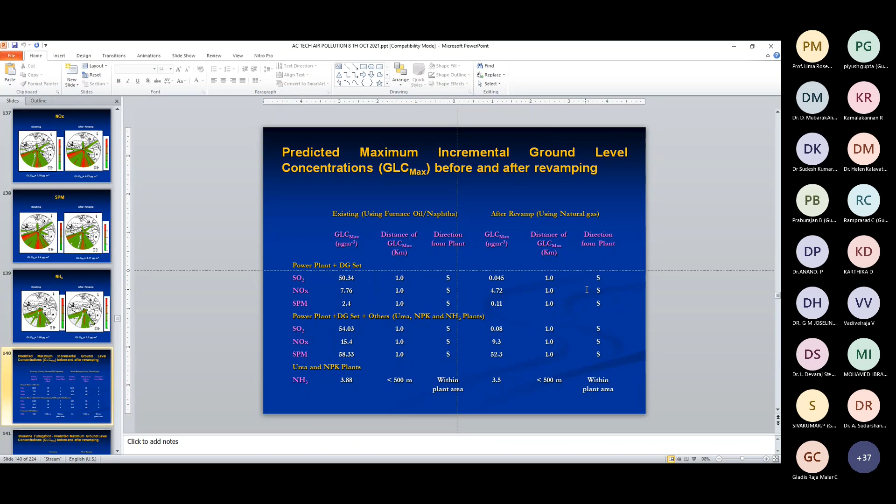This is some kind of shoreline fumigation, predicted maximum ground level concentrations. You can see here it's little negligible, in fact the NOx is very high.

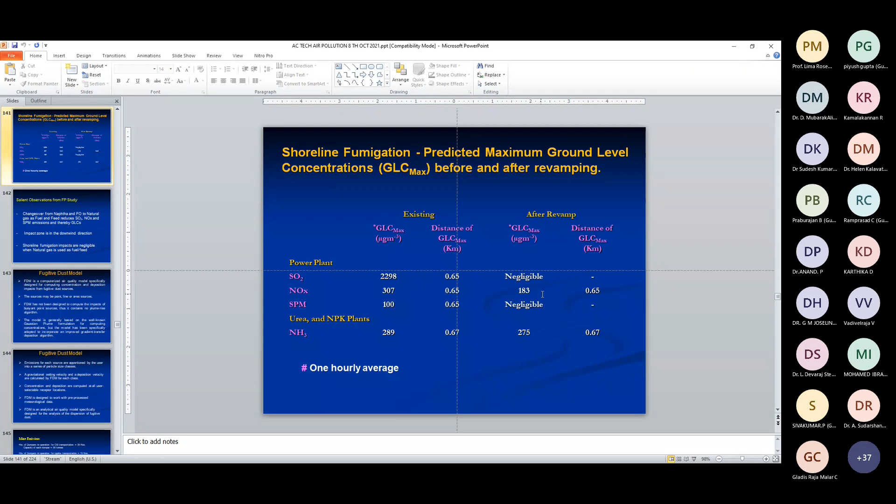Of course the ammonia content was high, of course from the naphtha plant, this is the model derived from the case study. So this is also a model derived from a case study.

So fugitive dust emissions, particularly in the foundry industry and in semi-arid regions, a lot of dust storms and dust materials make up the fugitive emissions. What we call uncontrolled emissions are called fugitive emissions, or otherwise we can say natural emissions like dust particles and other things.

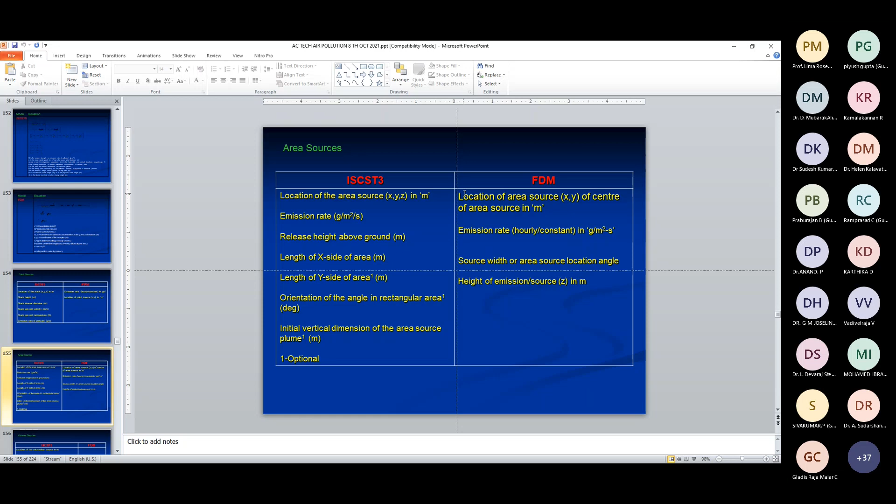This is an ISCST model and FDM model. It's a comparison - ISCST and FDM model comparison. ISCST.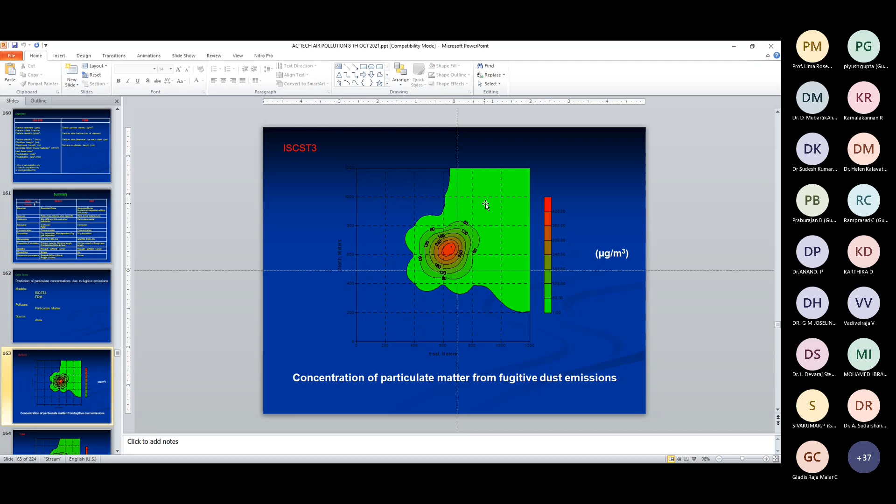That means you can look at it here - there is no 8 or 7. So here there might be a residential area. That's why the pollutant levels are not that much acutely concentrated.

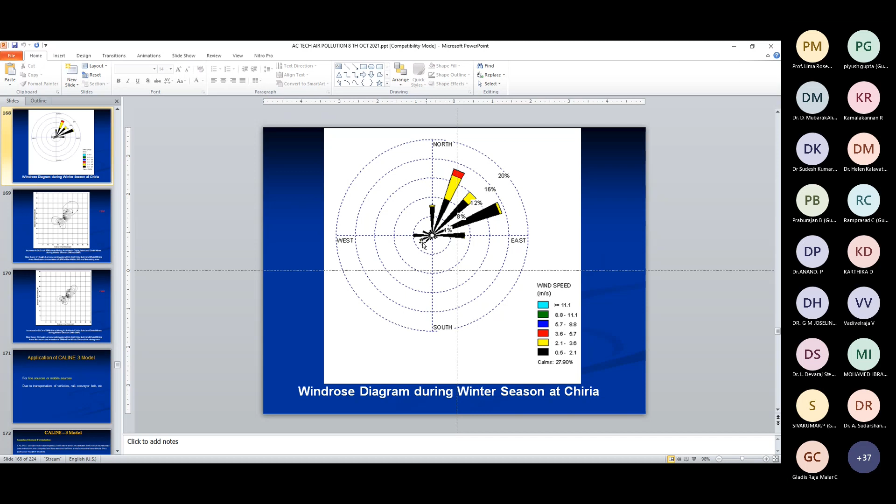So the diurnal concentration in the daytime, how the dispersion on the isopleth contours can be made, we have made it. So the contouring. Of course, the CALINE-3 model - highway air pollution model, or the traffic air pollution model.

We count the traffic, we count the idling, acceleration, and cruising conditions. We do online monitoring using a chassis dynamometer, and take monitoring of all these pollutants from the source, and also do national ambient air standards ambient air monitoring. Both we synchronize together and predict a model.

So of course, the CALINE-3 model is only meant for vehicular pollution. We use a line source or CALINE-3 model to predict the maximum ground level concentrations.

And this is the emission strength of each parameter, how it is. So that is what you can see.

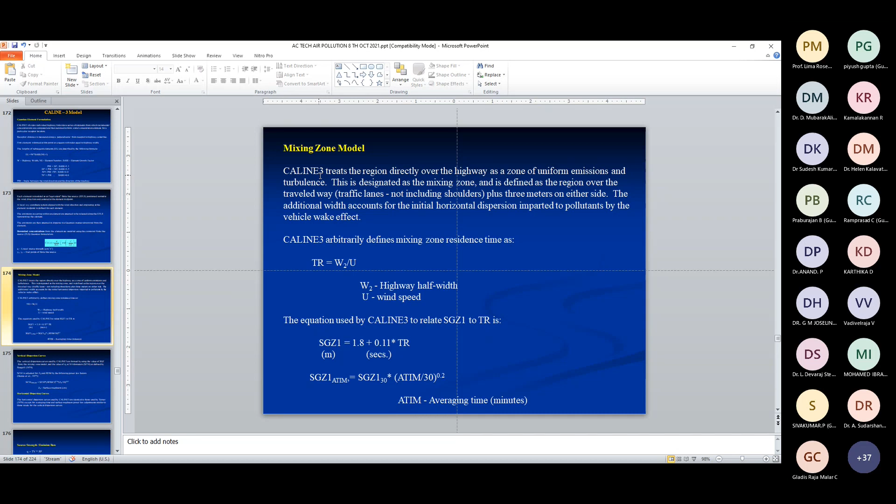This is an equation. So the mixing zone model - I talked about mixing height and ventilation coefficient, or the mixing zone model for using this, because we can predict the lapse rate, but vehicular pollution is not from a single chimney. It doesn't go to a high altitude because it gets dispersed on the surface, and that modeling is a little bit different - what we made is a multiple point source or point source model.

And this is a vertical dispersion curve. So this is the source data, road endpoint of coordinates.

Traffic volume we need, emission factors we need, and number of line sources, number of receptors, number of hours of meteorological data, surface roughness, averaging time, and ambient background concentrations, wind speed, wind direction, atmospheric stability, mixing height, and the location of receptors.

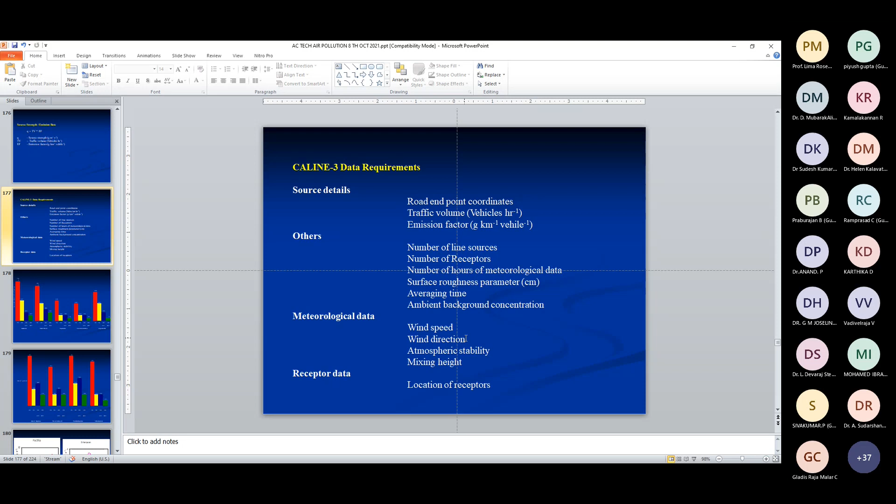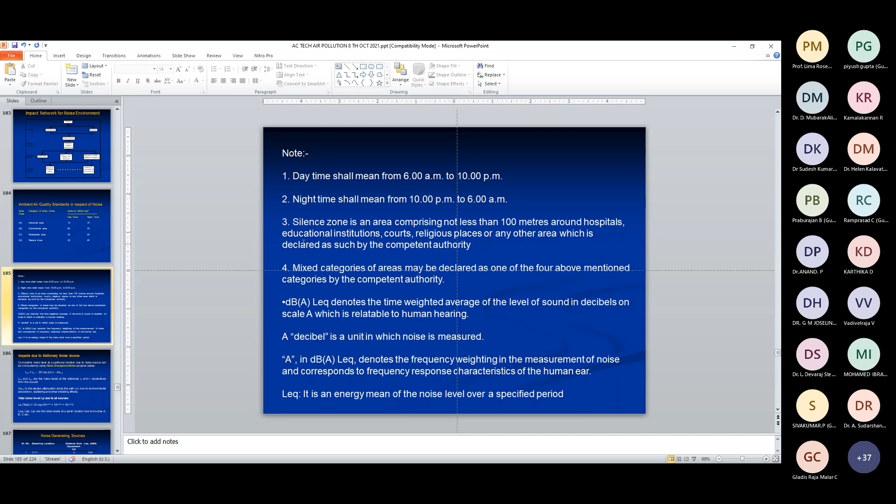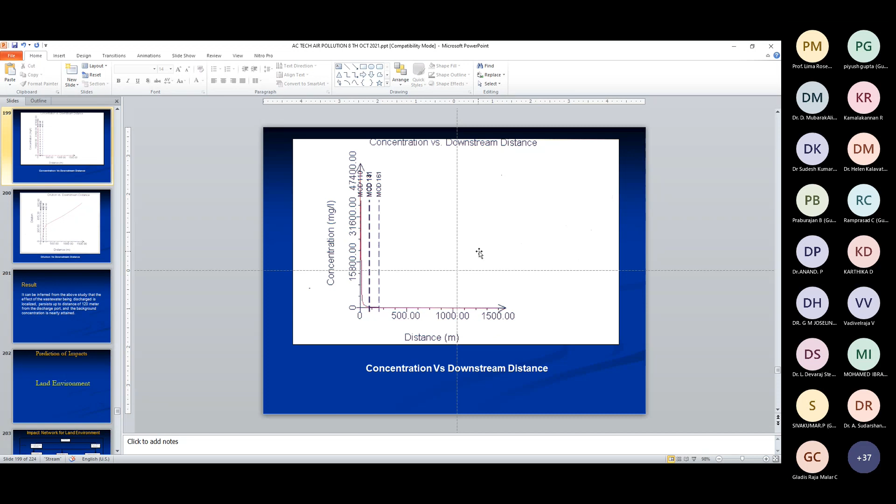This is the concentration versus downstream distance, and some of the results we have shown.

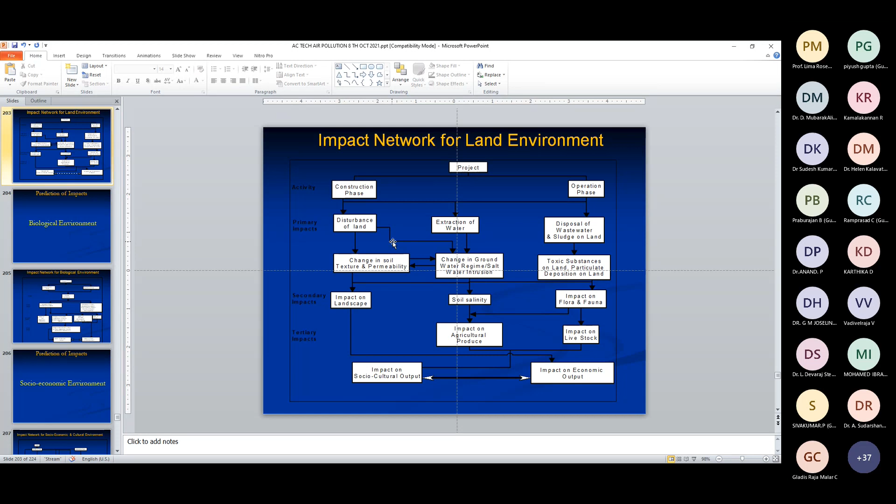Regarding impact on the network, whatever the confidentiality of the data, we need to make an end-to-end encryption and protect it to create a Google map within our own country. We can protect the security very much using this. So this is the impact predictions.

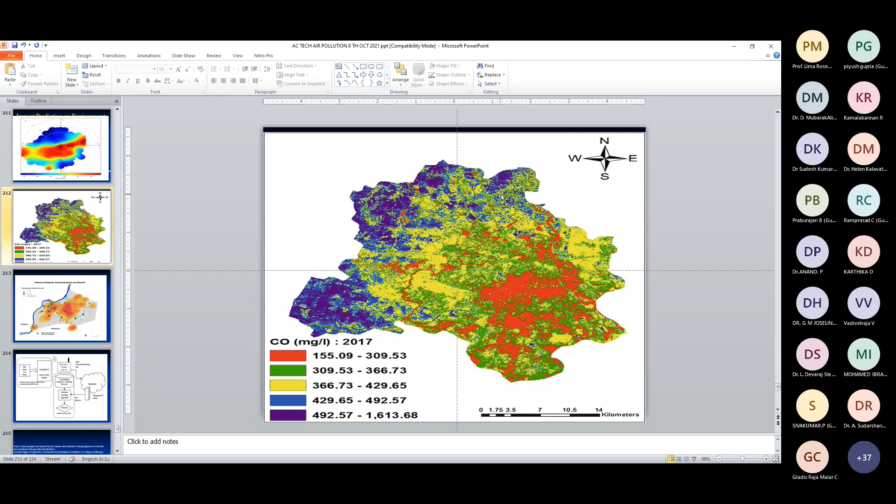So when a pollutant is here, how long it can travel - you can see how these dispersions are normally well predicted using red, yellow, blue, and green colors in the mappings.

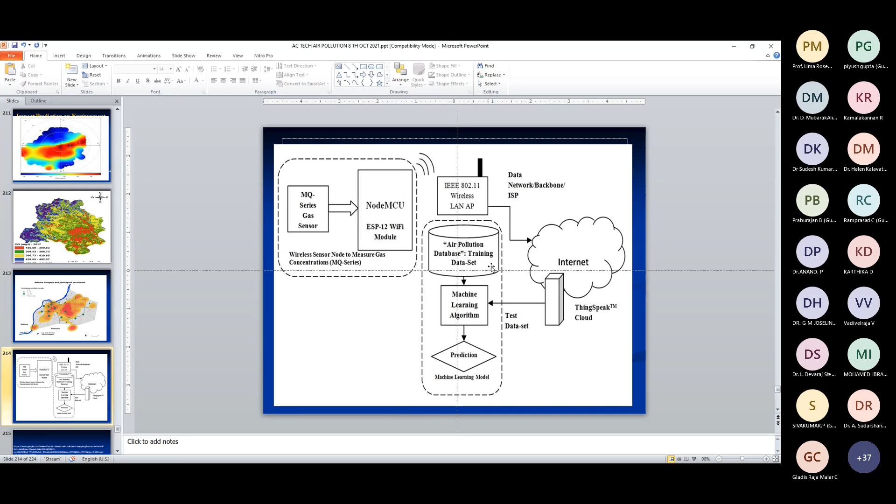This is a simple algorithm for using IoT and artificial intelligence in a network-based air pollution prediction and assessment system. This is the air pollution data algorithm - a wireless LAN network and air pollution data acquisition system that gets the data along with meteorological parameters data. Then it predicts every meteorological parameter's influence on the dispersion of pollutant, and can automatically give the maximum ground level concentrations in a particular environment.

This is particularly at the CARE Air Center in Tamil Nadu Pollution Control Board, where only monitoring is done. But AI, cloud, and IoT enabled software-based air pollution predictions in industrial corridors, urban atmosphere, and traffic corridors can be synchronized and put together.

When I say traffic corridors, with image processing analysis, every automobile exhaust concentration of pollutants can be trapped using sensors. There are a lot of remote sensors available to quantify the concentrations remotely while the vehicle is in moving condition, and it can automatically note the concentrations and vehicle conditions, then send a small notice to the particular owner, who can come back and get it fixed.

This is an online-based monitoring and control system that I made - creating advanced air pollution Google thematic mapping for predicting eco-friendly routing to avoid heavy air pollution corridors. Automatic automobile monitoring, surveillance, and compliance systems using IoT and cloud computing are very much essential.

National and state level real-time ambient air pollution monitoring and predictions are being done through cloud computing and IoT software, creating thematic mapping of red zones, green zones, and yellow zones according to existing predicted real-time air pollution levels. This is very important for making thematic air pollution mapping.

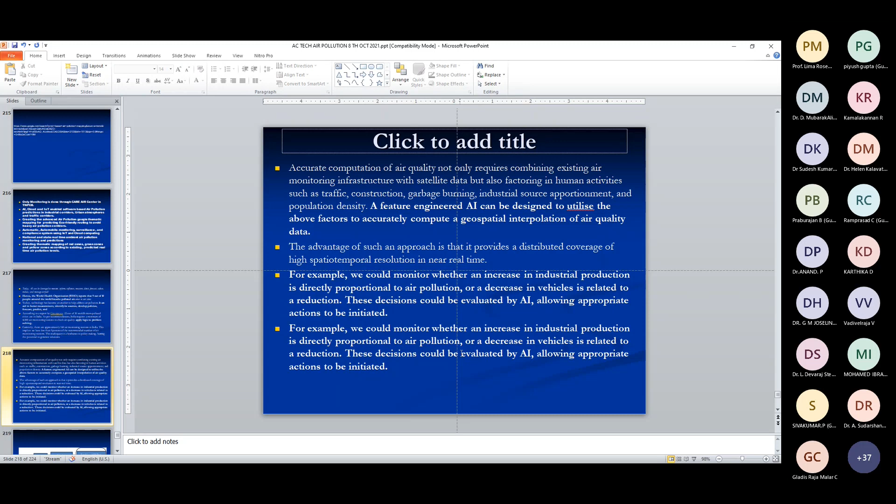These decisions could be evaluated by artificial intelligence, allowing appropriate actions to be initiated. For example, we could monitor whether an increase in industrial production is directly proportional to air pollution, or a decrease in vehicles is related to the reduction.

This was well demonstrated almost 5 years before with a real-time air quality index mapping system. You can pinpoint Bhopal, you can pinpoint Calcutta, and you will get a real-time air quality index whenever needed. That kind of system is instant, not predicted. As it is today, it will show you exactly based on data availability.

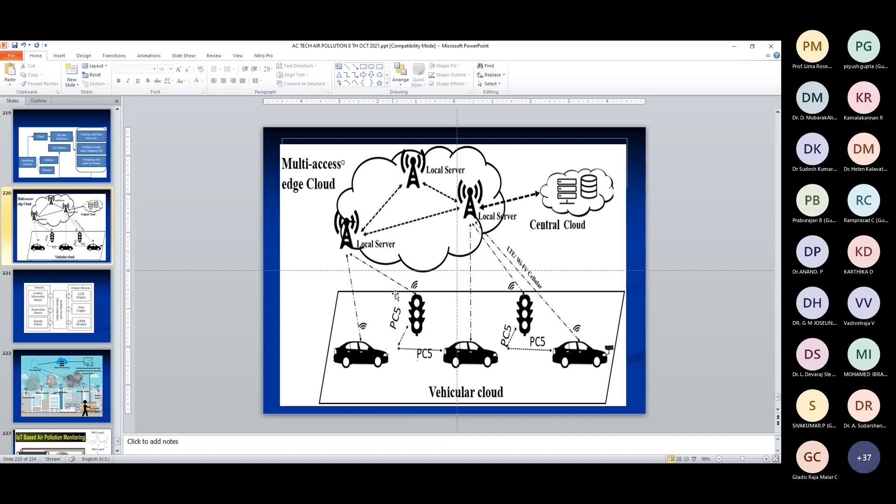So this is again cloud-based, called vehicular cloud, for vehicular pollution control. The sensor can detect automobile pollution and send it to the central cloud, which can then predict and show you for 1 month, 1 week, or 6 months what the likely concentrations could be in that ambient environment as well as the auto exhaust emission load. It can calculate and give you results based on emission factors.

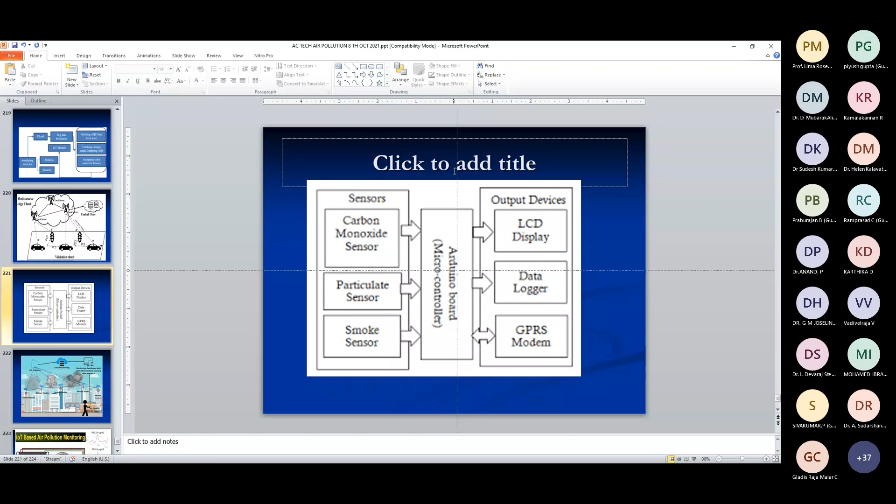So that's what I wanted to present on IoT, cloud computing, and artificial intelligence based air pollution prediction systems. It has a very long way to go to demonstrate particularly. I thought to make it because to run it and show it to you would take an hour.